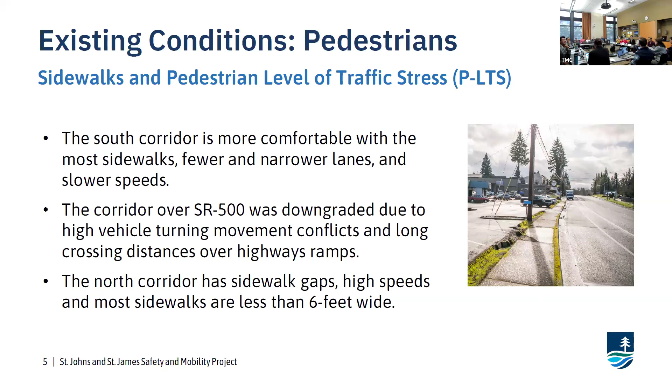Similar to the pedestrian level of traffic stress, we also look at the bicycle level of traffic stress for the corridor. Similarly, the southern segment of the corridor has lower traffic stress compared to the northern segments of the corridor, which have more and wider lanes and more and faster moving vehicles.

So for much of the corridor, just to let you know what's currently out there in terms of mobility lanes, they're typically 4 to 6 feet wide, and there's not vertical protection or delineators currently out there.

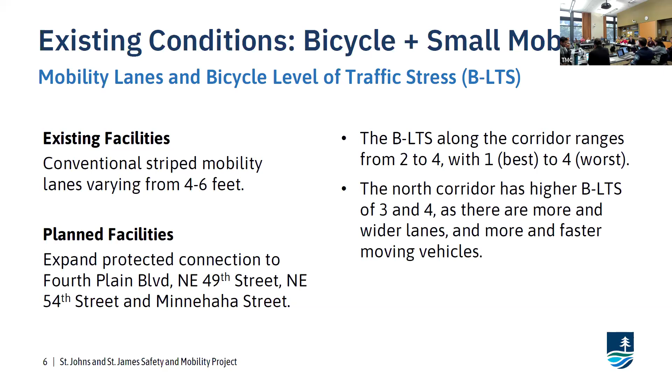So what are the conditions for transit? Right now, there are 3 C-Tran routes on the corridor, including 2 local service routes, the number 6 and the number 25, as well as the Vine, which runs east-west on 4th Plain.

Weekday boardings are considerably higher than weekend boardings along the entire corridor for all stops. The stops with the greatest number of boardings northbound were at Fort Vancouver Way and St. Johns Boulevard, and southbound at St. James Road and 52nd Street. Different numbers of boardings going north and south, which I found interesting, but well-used routes. And obviously the Vine along 4th Plain is a great connector in the city on this corridor.

So what are the roadway conditions out there? It varies in condition and facilities along the entire corridor. For example, the segments vary from 2 to 4 lanes, some with center running turn lanes, some with turn pockets. And the lanes range, this is one of my favorite things I found from the existing conditions, from 11 feet to 21 feet wide for certain lanes. So there's a very different context on the corridor and very different conditions, whether it's 1 lane or 2 lanes, so the treatments might look different because the conditions are different out there.

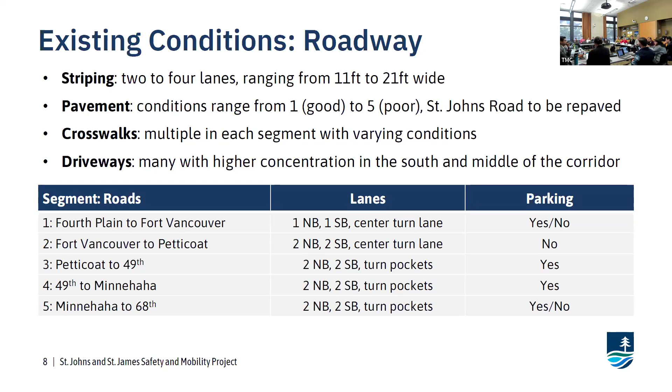The existing conditions also look at traffic conditions—vehicles, bicyclists, and pedestrians. The highest number of vehicle trips occurred in the middle of the corridor at segment 3, which is where the interchange is with SR 500. This also has the most amount of lanes, so that kind of makes sense: the most cars, the most lanes, the most people coming on and off the corridor.

All of the corridor saw vehicle speeding. The largest difference between posted speed and average speed was also in that same segment 3. The posted speed is 35 miles an hour and the average speed was 44 miles an hour, so almost 10 miles above the posted speed limit in that section, which also has the most vehicles.

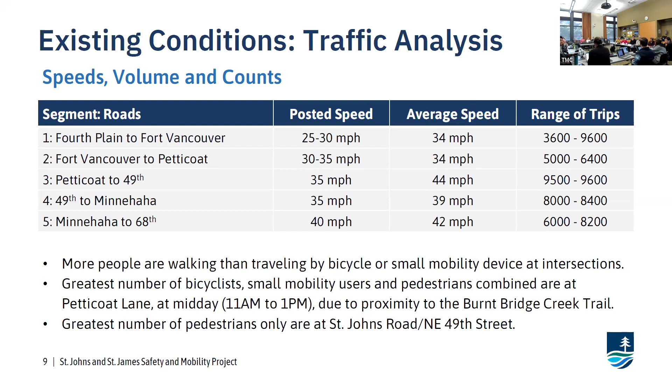There were more pedestrians than bicyclists and small mobility users, with the greatest number of pedestrians located at St. Johns Road and 49th Street, which kind of makes sense with the school and more pedestrian traffic up there. Overall, the most active transportation users—pedestrians, bicyclists, and small mobility users—were observed at Petticoat Lane due to proximity to the Burnt Bridge Creek Trail, so the most active transportation users are at the intersection with the trail.

So what is the current level of service? We also did counts for this. The level of service ranges from A, the best, to F, the worst. Most of the intersections today along the corridor operate at a level of service C or better, meaning the majority of drivers don't experience delay in the morning or evening peak commutes, nor do they have to wait multiple cycles to go through lights. So the intersections are operating well along the entire corridor.

The main and only intersection in current conditions that doesn't operate at level C or better is St. Johns Boulevard and 33rd Street during peak hours, specifically due to delay on the east and west legs—there are more cars than can go through at one time, which degrades the entire intersection. So, current conditions: all intersections except for this one are functioning well, above level of service C.

For the future year level of service, we take the existing conditions and project out what we think the future vehicle use will look like. We looked at the year 2028, the nearer term, and 2040, the future term, so about 15 to 16 years out.

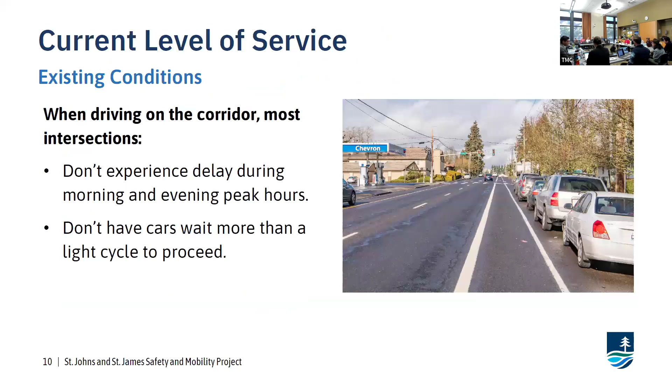I have a couple things. I wanted to speak to Section 2 and the importance of it for people in transitional housing or kind of in and out of using lower income services, because the VA campus is right there. There's 2 treatment centers, a detox center, as well as Lord's Gym, there's CMAR - there's a lot of places where lower income people or people in transition are accessing services.

And those people are more likely to be traveling by transit, walking, or bicycling. So I think emphasizing the importance of building up this corridor for that is really important - maybe people aren't aware of that. I don't know if this exists, but having some kind of map of those services and how they connect to transit networks would be really nice.

It sounds like it should exist. I could provide a basic one that's probably kind of crappy, but with that idea, I think this is amazing. Some people might think it's a waste, but I think it's a fantastic investment, especially looking at Section 2.

Also, something that really jumped out to me - because I'm always looking for these kinds of red flags - is with the existing conditions saying right now we have more pedestrians than cyclists. My mind goes, oh my gosh, they're going to think bicyclists don't go there, they're going to build it just for pedestrians. That's obviously a paranoia.

But at the same time, I'm wondering when we look at these existing conditions to use as a model to move forward based on needs, it's also at the same time true that the more ideally we make these areas safer, the more cyclists or pedestrians will use this route. So just going by the existing conditions kind of gets me worried.

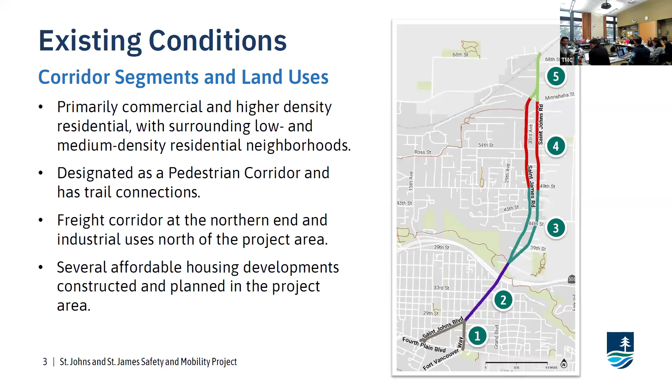I think what I'll insert here before letting you continue with the presentation is whether, at a future workshop or in a separate memo to us, we could see how we're matching up with C-Tran's longer term goals for community routes. Because when we had that conversation about Highway 99 and not having that direct connection to the 99th Street Transit Center, they were going to improve movement in the routes to make sure they synced up and got people where they needed to go. Also, as our community continues to grow and we expand the boundary, how are we taking that into consideration?

Another thing that might come up with community members in this area that I'm not as familiar with is any movement related to the school district - school buses. That's a common one that usually comes forward to the commission, like, during school time we're going to get stuck behind the yellow bus or whatever. So just helping us be prepared with the full picture for when the time comes to make recommendations.

Yeah, I'll talk to C-Tran first - we're already coordinating with them on this corridor. We're looking at where we can provide better connections to their existing stops, and where they may or may not be keeping stops along this corridor or adding new ones. So that conversation is already happening and will continue as we move forward in this process. But we'll double check to make sure it's all in line with their plans too, and note that in our documentation. That coordination is already happening on this corridor.

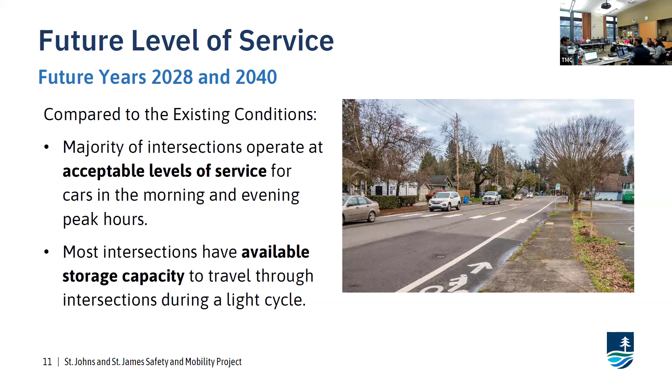Okay, let's continue into the next part.

Awesome, thank you. Hello again everyone, I'm Brett Setterfield, talking about community engagement for this project. Engagement began in early spring, late winter. We developed a Be Heard Project webpage and a survey that was open for a little over a month, from April 1st until May 10th. The survey also included an interactive map, so users could place pins where they have issues or would like to see things, similar to other projects.

We also held an in-person event at Discovery Middle School in mid-April, alongside the Upper Main Street project. We had valuable discussion with community members in attendance, where we heard a lot about the importance of that north-south connection, and a big one is the connection to the Burnt Bridge Creek Trail, just north of SR 500.

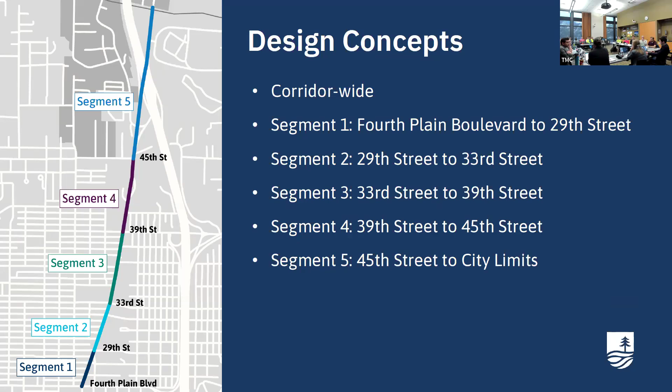First, talking about corridor-wide recommendations, this has to do with crossing improvements. In our first round of engagement, we heard that people didn't feel safe using crossings and wanted to see more crosswalks. We acknowledged there were some gaps in our crosswalk spacing and, based on our pedestrian crossing policy, needed to fill those gaps.

Ultimately, the way these are listed on the slide, we asked folks in our online survey and at the open house which locations people supported adding a new marked crossing. Number one is the north side of 31st Street, right by Vancouver School of Arts and Academics. We got the most support for that crossing.

The south side of the 28th Street intersection, by Dairy Queen, came in second. The south side of 35th Street, by PeaceHealth Medical Center, was third most supported. South side of 37th Street, by Safeway, was fourth most supported, and only 6.5% said none of these locations.

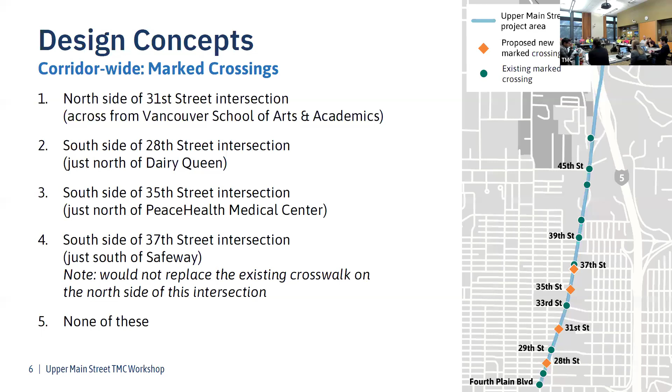One thing, for example, is where we see the biggest crossing gaps on Main Street would be the 31st Street crossing and the 35th Street crossing, filling those gaps. So 35th might be a higher priority than 28th. More to come on what our final implementation on that would be.

And then also median islands—we talked about adding these at these new crossing locations in particular. In that first round of engagement, we heard that people want to see more investments at existing crossings to make them feel safer, and also at new crossings.

Median islands—we talked about at our last TMC meeting, there were some concerns from commissioners about them. Really, they would reduce the number of travel lanes, so it's a traffic calming measure, but you're by no means required as a pedestrian to stop there. They're there to protect people in the event that cars don't stop—a place for pedestrians to be safe and protected.

The way they would be designed is there would be a cut through in the median island that would be level with the street, so someone in a wheelchair doesn't have to ramp up onto it. We are looking into whether to add a push button in the median island so someone could cross halfway, but essentially it would be push-activated on either side of the sidewalk for someone to cross through.

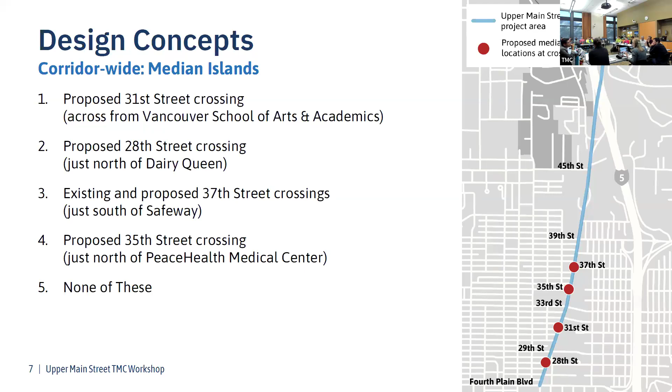So now we go diving into the different segments, starting with segment 1 from 4th Plain to 29th Street. The original recommendation here was to shift the existing crossing at 29th Street from the north side of the intersection to the south side. We had heard that people don't feel safe using this existing crossing, and the visibility is really challenging at this intersection. This is also where Broadway is coming up and joining Main Street here.

We also proposed adding a median island at this location, which would essentially take the northbound dedicated left turn lane. Ultimately, in the survey, people were pretty supportive of it—60% of survey respondents support or strongly support this recommendation.

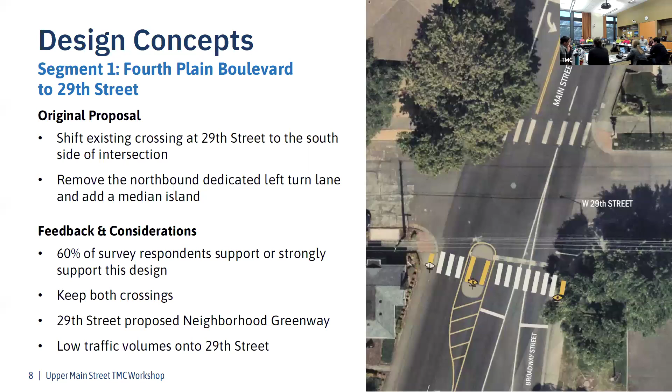We also heard considerations about, well, why not keep both crossings—having one on the north and south side of the intersection. This also intersects with 29th Street, which is another safety and mobility project we have, so we looked at what the network recommendations in our transportation system plan say for that street. We had pretty low traffic volumes, especially the turning movements, left turning movements.

So ultimately, we decided to take this design a little further. We are now proposing that we have a marked crossing on both the north side and the south side of the intersection. We would keep the rapid flashing beacon. We're looking into whether that would be push activated from both crossings, or whether the south side crossing wouldn't have a rapid flashing beacon—it would just be the north side.

We'd essentially replace both the northbound and southbound left turn lanes with a median island, and would have cut-throughs for people using bikes or small mobility devices, which really supports both slowing speeds and prioritizing pedestrians in this section for the Upper Main Street project. It helps with the future neighborhood greenway on 29th Street. So essentially, folks driving on 29th Street would only be able to turn right off the street, and folks driving on Main Street would only be able to turn right onto 29th.

Given that we have more of a grid street network here, folks that want to make that left turn can go right up to 33rd or 31st to make that turn if they need to. I'll also add that just north of here at 29th is where we're proposing that one northbound through lane be removed. North of 29th, probably till about 30th or 31st, is where the merge of the two northbound travel lanes would happen.

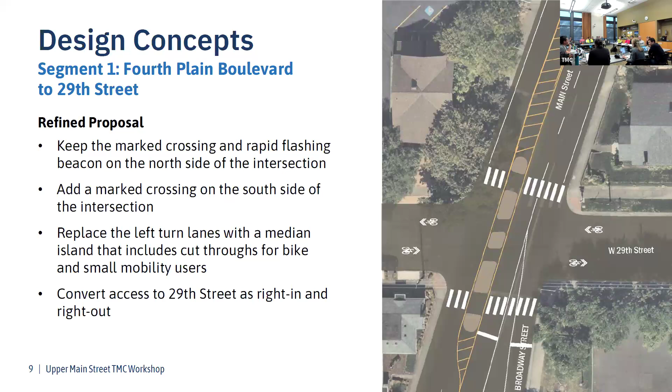Feedback and considerations: 45% of survey respondents said they supported or strongly supported this design. This was more divided, with 34% opposed or strongly opposed. We did also hear support for wider sidewalks in this area and crossing improvements, and we also heard from folks about wanting to see mobility lanes potentially extended further down here.

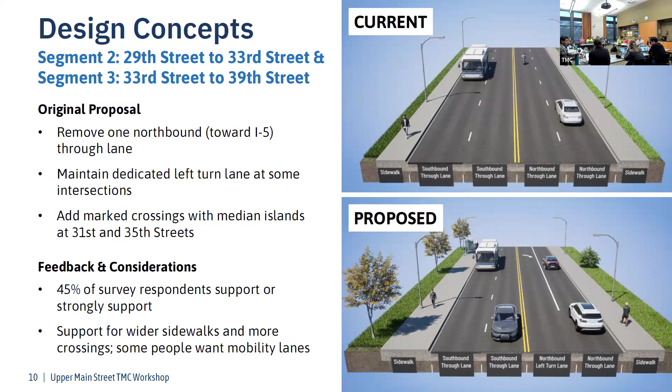Ultimately, our refined proposal still removes a northbound through lane. Essentially, what we'd be proposing is replacing that through lane with space for median islands and marked crossings, to maintain dedicated left turn lanes at the major intersections, in particular 33rd and 39th. Those have higher left turn volumes, so we're looking to maintain those left turn lanes.

Also, as part of our traffic analysis, when we looked at removing a northbound through lane, essentially what helped with maintaining, not having a bunch of congestion, was that we had either dedicated left turn lanes or a center turn lane. So really getting anyone who's turning left out of the through lanes to let traffic still be flowing well.

Again, the new marked crossings with median islands at 31st, 35th, 37th. We'd also be looking at, in some parts of these segments, the lanes are very narrow, where there are dedicated left turn lanes, two through travel lanes in each direction. But on the more southern edge of these segments, with 4 travel lanes, so 2 travel lanes in each direction, the travel lanes are actually 12 feet, which is a little too wide, we think.

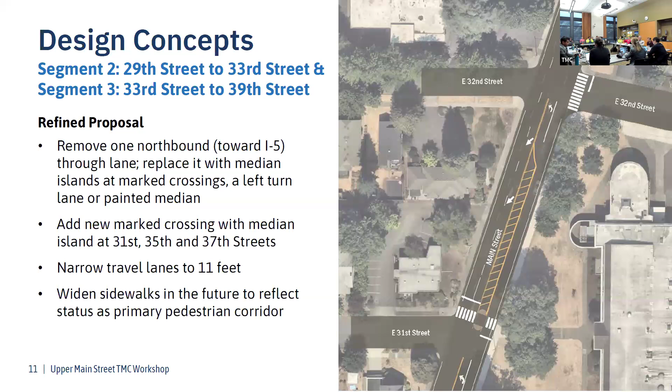Okay, we can proceed. Okay, so this is where it gets real tricky - 39th to 45th Street. 39th Street is our most constrained intersection on the corridor.

We have 2 travel lanes in each direction and then dedicated left turn lanes. Currently, the existing travel lanes are between 10 and 9 feet wide, which really isn't wide enough to even accommodate the width of C-Tran vehicles. What we heard from folks about this intersection in our first round of engagement was it doesn't feel safe as a pedestrian.

We were also looking at the TSP, which does identify 39th to the Discovery Trail on our bike and small mobility network. So our original proposal was to again remove a northbound travel lane here. That gives us space to widen the other travel lanes, accommodate buses, large trucks, fire trucks, and then have the protected two-way multi-use path start at 40th Street - so not connecting to 39th Street.

What we heard from folks was 61% were supportive or strongly supportive of this design. We had 27% that opposed, based off our survey responses. We did also hear from folks about, if we're going to be directing people to F Street, the 39th and F Street crossing feeling really unsafe. And also folks really pushing us to extend some kind of facility to 39th Street.

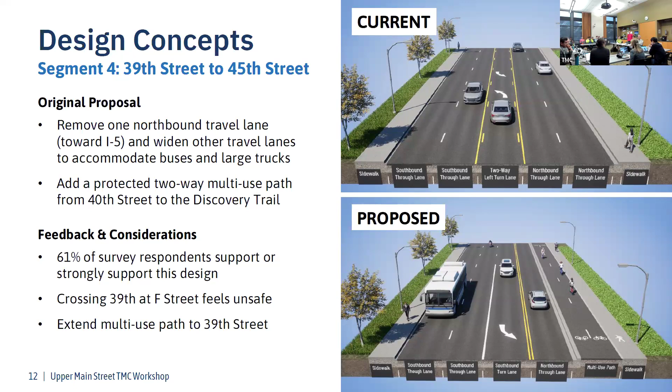So we ended up looking at both the 39th Street and 40th Street intersections here. Ultimately, we have two options for this refined proposal. This shows removing one northbound travel lane, widening the other travel lanes, the protected two-way multi-use path starting at 40th Street to the Discovery Trail.

We're looking at adding buffered bike lanes on 40th Street to F Street, so between Main and F Street, to help get folks to the F Street connection. We're also looking at adding some curb extensions, also commonly known as diverters - partial diverters at the 39th and F Street intersection - to really help deter cut-through traffic on F Street and support the future neighborhood greenway on F Street.

And looking at adding median islands, rapid flashing beacon, and marked crossings at 39th and F Street - that would be two marked crossings at that intersection. Essentially one for people using bikes or small mobility devices - they'd ramp up onto that curb extension, go through the crossing, and then continue south or north on F Street. Then also another marked crossing at that location for pedestrians.

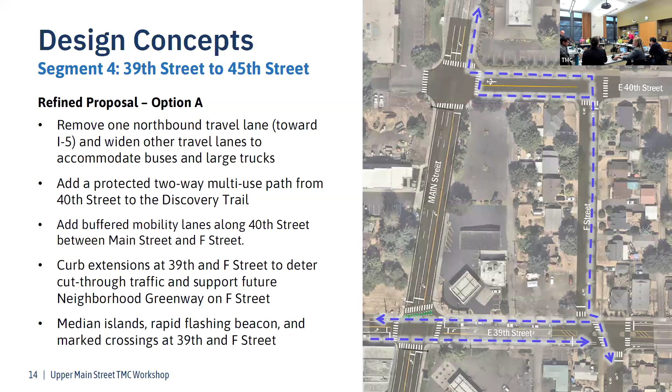Before we pause for questions, I want to share the other option. Our Option B essentially is everything we talked about in Option A, but would add a southbound mobility lane from 40th to 39th with a 2-foot buffer protection.

If someone is using the multi-use path connection at 40th, let's say they're coming southbound, they would come from that multi-use path, cross the street to the west to get to the other side of Main Street, and then be able to use the bike lane there to connect to the bike lanes on 39th.

This is the space we have to work with—we can only put a mobility lane in one direction on this one block. The southbound direction seemed more favorable because we're already directing folks making connections on the east side to F Street, so really we want to improve that west side connection to Columbia. The southbound direction is also more appealing due to land uses on the east side—there's a gas station there with large driveways and cars coming in and out a lot. Having a connection on the west side just seems safer with less potential conflict.

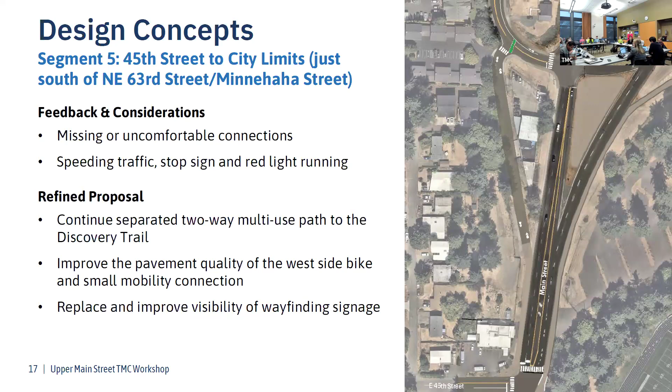The last piece for segment 5, which we didn't share the first time, is still a longer term solution, north of Northeast Ross Street on Main Street. Currently that's where the railroad underpass is, with bike lanes on both sides of the street that are pretty narrow, especially in that underpass.

So we're looking at whether we could maintain the width of the existing travel lanes by shifting the travel lanes to the west. The bike lane space that currently exists could essentially be combined on the east side of the street, giving us more space for a two-way protected multi-use path.

We don't want to implement this unless we have agreement from the county that they will have a similar facility just north of the railroad underpass. It would require them to have some kind of signalization just north, or facilitate some kind of crossing there just north of the city limits.

So we really want to make sure that, as long as they're committed and can provide those connections, we work with them to ensure a consistent treatment across the jurisdiction lines. This is one option we'd propose, but we still want to work closely with the county to figure out what might be possible for them.

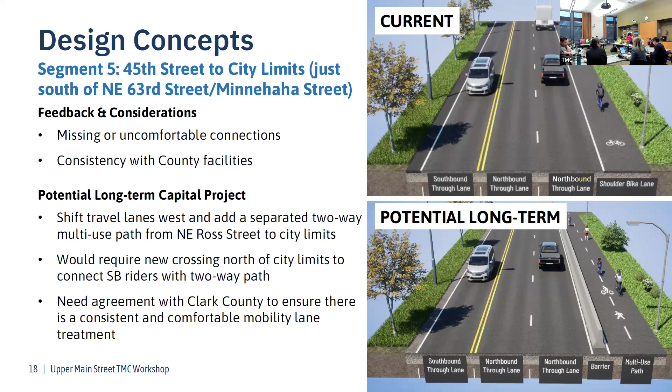So really just to wrap up, this was our last workshop with the TMC. We're planning to do final refinements to these design concepts and come with our final recommendation in July with a TMC hearing, and then we would continue the project on. So that's our last touch point for that project with the TMC.

So what I heard tonight in general outline is what I think staff is leaning towards recommending: easy improvements like additional cross bike markers at 39th and Main and 40th and Main. The bigger thing I heard is the section between 31st and 39th and folks not liking the treatment there, so we can do our best to revisit that. We are on a very, very tight timeline for paving.

I guess my question for the commission is, sorry, we can take another look at 31st to 39th. I think our options are limited, but we could bring you a couple different options.